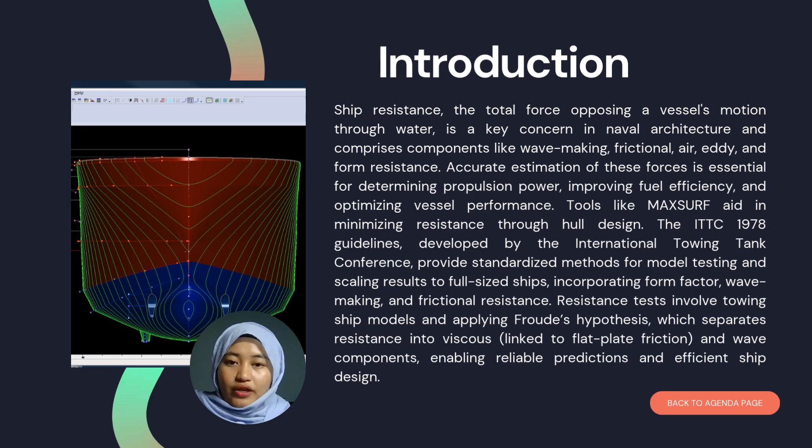The ITTC 1978 guidelines, developed by the International Towing Tank Conference, provide standardized methods for model testing and scaling results to full-size ships, incorporating form factor, wave making, and frictional resistance. Resistance tests involve towing ship models and applying Froude's hypothesis, which separates total resistance into viscous, linked to flat plate friction, and wave components, enabling reliable predictions and efficient ship design.

Literature review. The evolution of ship design has been closely tied to understanding and reducing hydrodynamic resistance. Modern tools like MaxSurf have revolutionized this process by replacing traditional towing tank tests and empirical methods with advanced computational simulations. MaxSurf supports resistance prediction through empirical Holtrop, Savitsky, numerical potential flow panel methods, and hybrid techniques.

It enables detailed hull form optimization using surface modeling and parametric design, with validation through comparison with experimental data. The software enhances ship performance, fuel efficiency, and compliance with IMO standards, making it essential in developing innovative, sustainable, and cost-effective vessels.

Derivation of form factor. Form factor accounts for the influence of hull shape on viscous resistance. It is derived by separating total resistance CT into frictional CF, viscous, and wave components. Three main methods to find 1 plus K are: 1. Low speed testing where wave resistance CW is almost zero. So 1 plus K is equal to CT over CF.

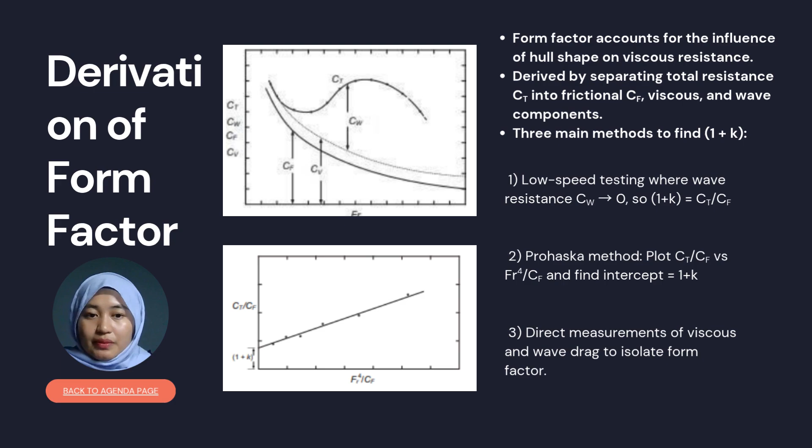Next is the Prohaska method, which is to plot CT over CF versus Froude number to the power of 4 over CF and find the intercept, which is 1 plus K. And lastly is the direct measurement of viscous and wave drag to isolate form factor.

ITTC 1978 Performance Prediction Method. This method revolves around predicting full-scale resistance using model test results and correction terms, which is this formula: CTS equals (1 plus K) times CFS plus delta CF plus CA plus CR plus CAAS. Delta CF is roughness allowance, CA is correlation allowance, CAAS is the air resistance.

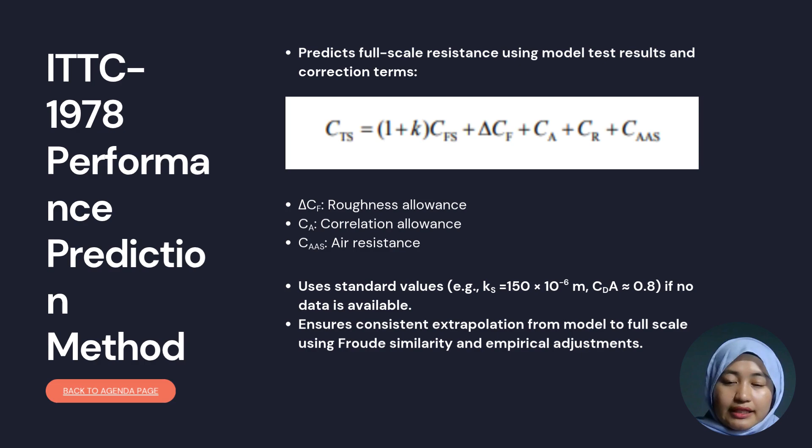This method uses standard values. For example, Ks equals 150 times 10 to the power of negative 6 meter. CDA is about 0.8 if no data is available. It ensures consistent extrapolation from model to full scale using Froude similarity and empirical adjustments.

The first objective is to carry out resistance prediction using model testing for a 181.5 meter bulk carrier in calm water condition. Second is to predict total resistance of the ship using the ITTC 1978 performance prediction method for the given bulk carrier particulars as shown in figure 1.

This figure shows the 181.5 meter bulk carrier. The bulk carrier particulars with respect to the actual full-scale test condition are listed as below. Length overall is around 181.5 meter, length between perpendiculars 172 meter, LWL 175 meter, breadth 30.5, depth 16.4, draft 11.373, displacement about 50303 tons, and the block coefficient is about 0.85.

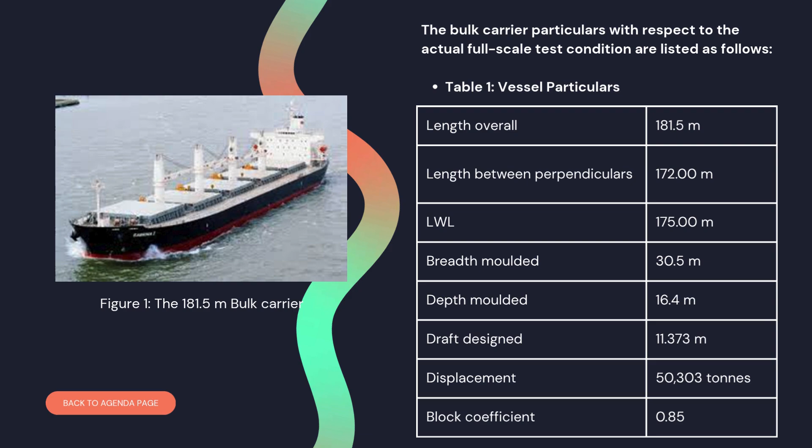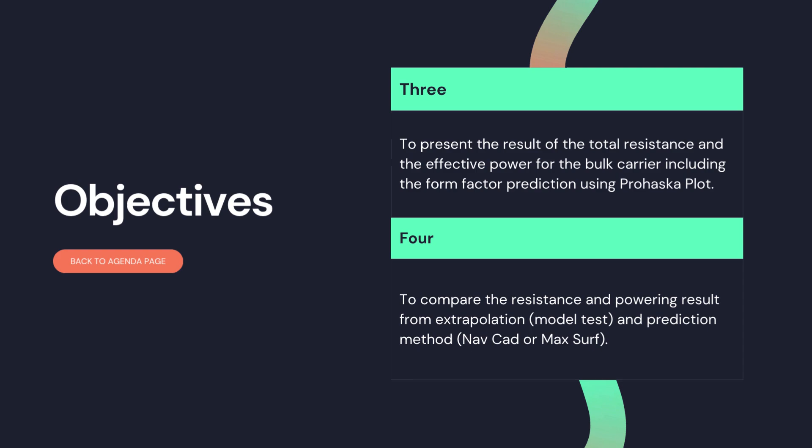The next objective is to present the result of the total resistance and the effective power for the bulk carrier, including the form factor prediction using Prohaska plot. And the last is to compare the resistance and the powering results from the model test and prediction method, which is NavCad or MaxSurf.

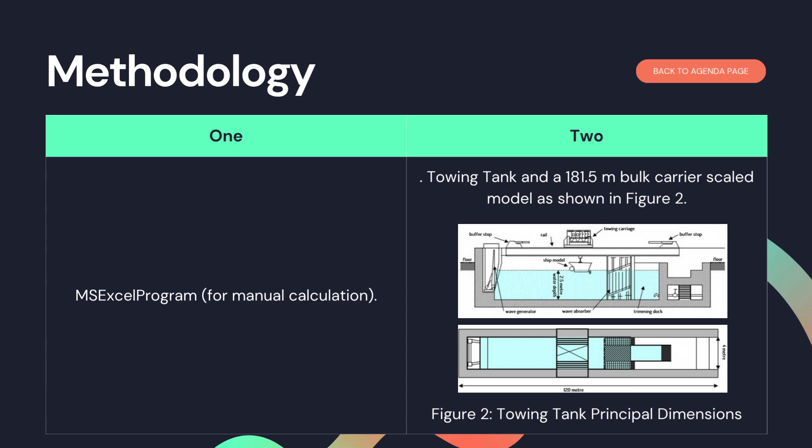For the methodology, the first one is using the MS Excel program for the manual calculation, and the next is we are going to use the towing tank and the 181.5 meter bulk carrier scale model as shown in figure 2.

For the apparatus part, the first one we are going to use is the MTC hull model. Second is using a towing tank. Third, by using a ballast weight. Fourth, a swinging frame. Fifth, DAAS, and also by using a towing carriage.

For the model scales, the scale ratio for the ship is 50 and the model is 1. LOA for the ship is 181.5 and for the model is 3.63. For LBP it is 172 and for the model is 3.44. For the beam, the ship is about 30.50 and the model is 0.55, and draft mean for the ship is 11.373, but for the model is

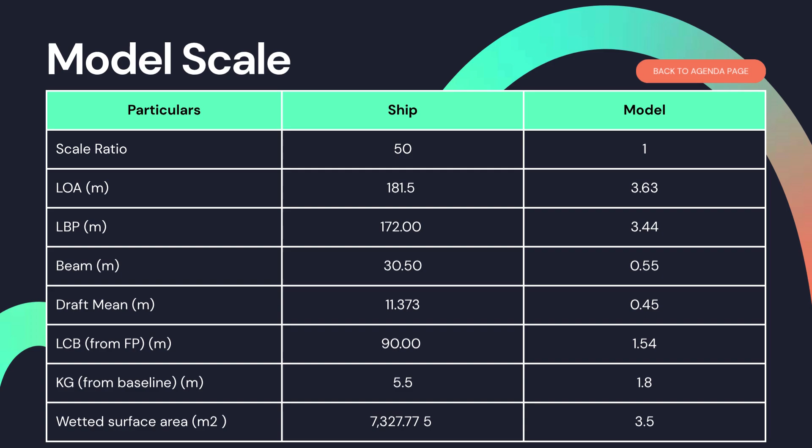0.45. For LCB from FP, for the ship it is 90, and for the model is 1.54, and the KG from baseline for the ship is 5.5, but for the model is 1.8. Wetted surface area for the ship is 7,327.775, but for the model is 3.5.

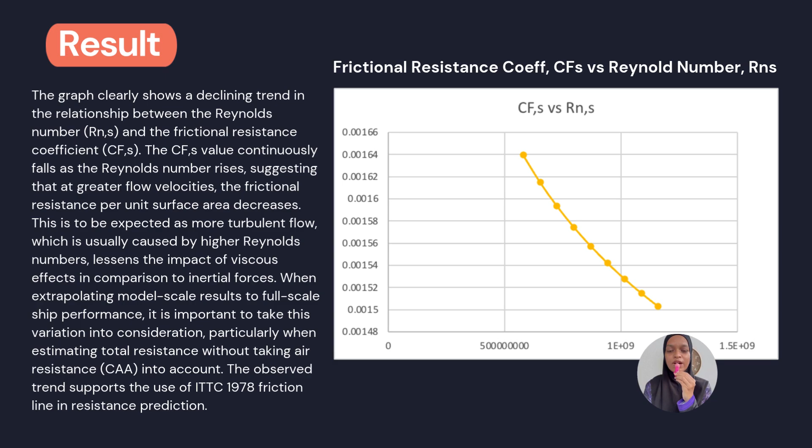When extrapolating model scale results to full-scale ship performance, it is important to take this variation into consideration, particularly when estimating total resistance without taking air resistance (CAA) into account. The observed trend supports the use of the ITTC 1978 friction line in resistance prediction.

As ship speed rises, the influence of residuary, primarily wave, resistance becomes much more pronounced compared to frictional resistance, which aligns with the ITTC 1978 method's prediction and highlights the need to minimize residuary resistance in efficient ship design at higher speeds.

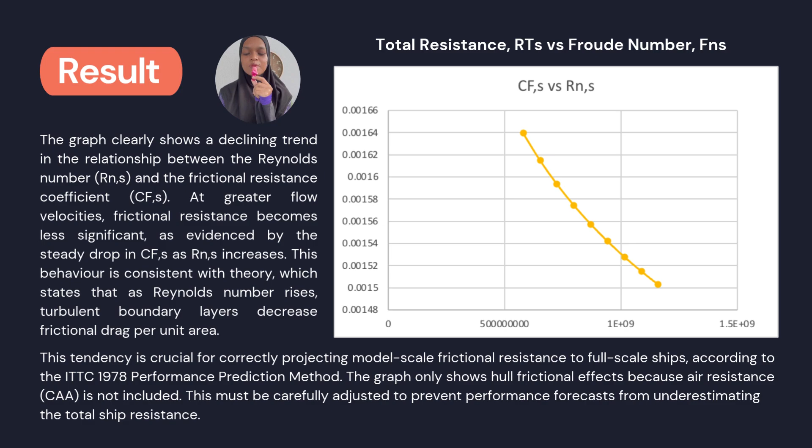The graph clearly shows a declining trend in the relationship between the Reynolds number and the frictional resistance coefficient. At greater flow velocities, frictional resistance becomes less significant, as evidenced by the steady drop in CF as Rn increases. This behavior is consistent with theory, which states that as Reynolds number rises, turbulent boundary layers decrease frictional drag per unit area. This tendency is crucial for correctly projecting model-scale frictional resistance to full-scale ships. This must be carefully adjusted to prevent performance forecasts from underestimating the total ship resistance.

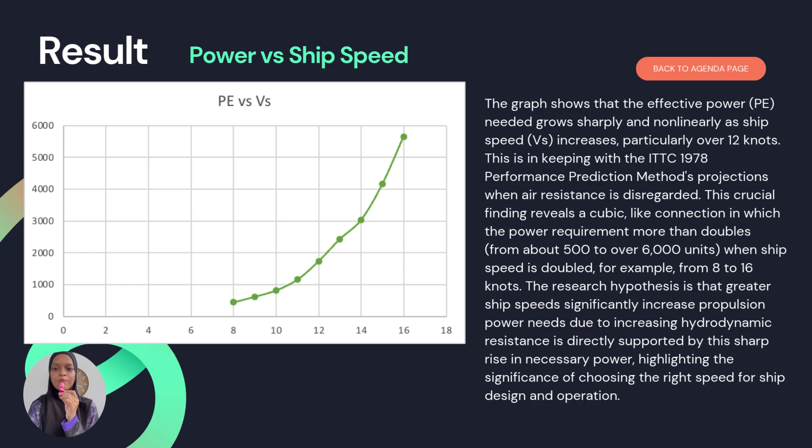The graph shows that the effective power needed grows sharply and non-linearly as ship speed increases, particularly over 12 knots. This crucial finding reveals a cubic-like connection in which the power requirement more than doubles, from about 500 to over 6,000 units, when ship speed is doubled. The research hypothesis, that greater ship speed significantly increases propulsion power needs due to increasing hydrodynamic resistance, is directly supported by this sharp rise in necessary power, highlighting the significance of choosing the right speed for ship design or operation.

Next, for the discussion, we have three main topics. The first is the resistance analysis approach. This study applied a Maxsurf resistance module to evaluate the total ship resistance across different speeds. While the actual towing tank results are pending, the setup and scale modeling provide a theoretical foundation for understanding. Second is the design principles and software use. Maxsurf proved to be a powerful tool in estimating hydrodynamic performance in early design phases.

Thirdly is the effect of hull shape on resistance. The model scale and form factor calculation suggested that finer bows and streamlined forms would likely result in reduced wave making resistance.

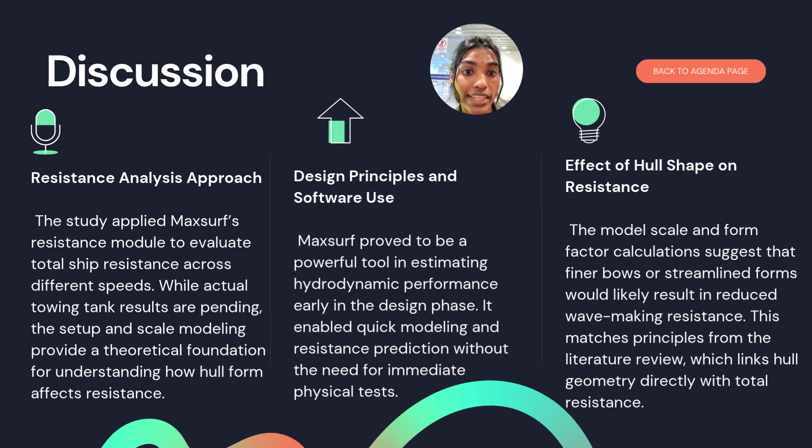And lastly, for the conclusion, the preliminary ship design and resistance analysis conducted using these methods provided valuable insights into hull performance. The application of theoretical scaling and the derived form factor aligns with established naval architecture principles. Although experimental resistance data are yet to be obtained, the current computational modeling and systematic approach lay a solid foundation for future validation.

Therefore, future work will involve towing tank experiments to verify and refine resistance predictions from Maxsurf simulations. Overall, this project highlights the efficiency of integrating computational tools in early stage ship design and performance evaluation.